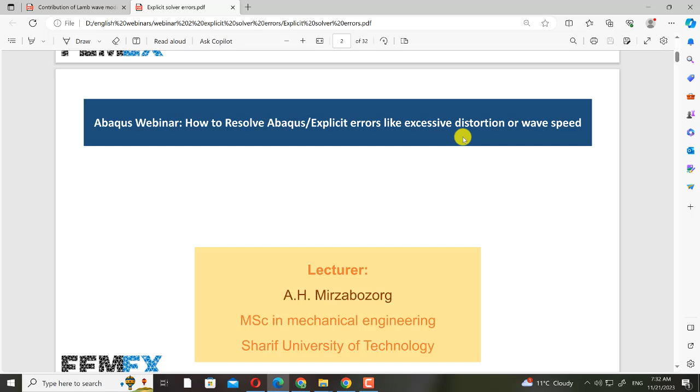Okay, I'm Amir Hossein Mirzabozorg, and in this webinar, I want to talk about how to resolve Abaqus explicit errors like excessive distortion or wave speed.

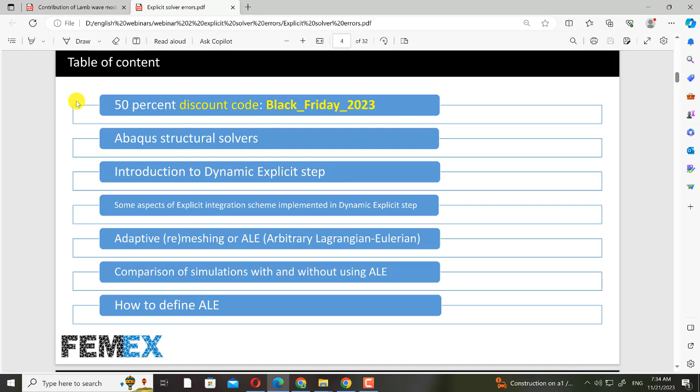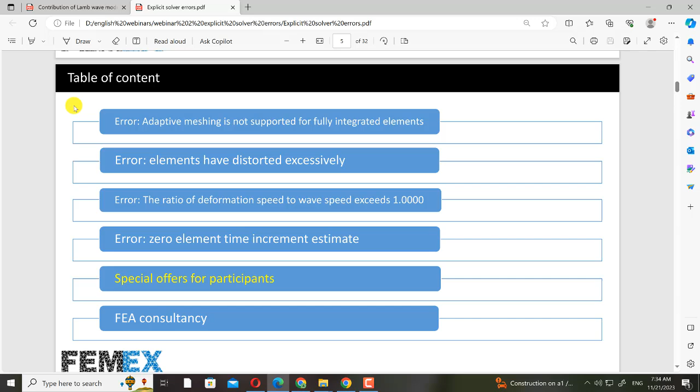And this is the table of contents of this webinar, and we will talk about a lot of useful things, and finally you will have a deep insight about the explicit solver.

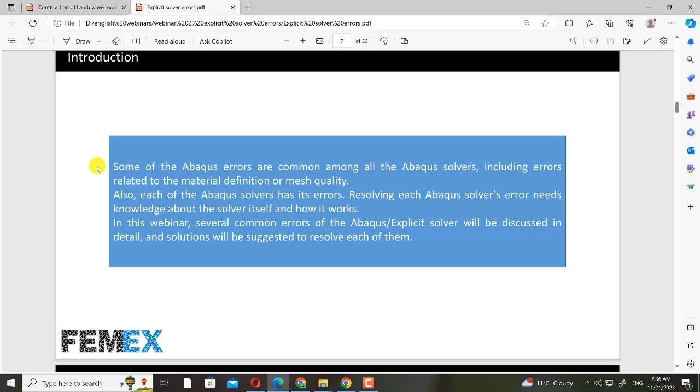Some of the Abaqus errors are common among all the Abaqus solvers, including errors related to the material definition or mesh quality. Also, each of the Abaqus solvers has its errors. Resolving each Abaqus solver's error needs knowledge about the solver itself and how it works. In this webinar, several common errors of the Abaqus explicit solver will be discussed in detail, and solutions will be suggested to resolve each of them.

As you know, Abaqus has two structural solvers for solving mechanical and structural problems. The first one is the Abaqus standard solver, and the second one is the Abaqus explicit solver. Abaqus standard solver uses implicit integration techniques for solving linear and nonlinear problems, and Abaqus explicit solver uses explicit integration techniques for...

Sorry, I forgot to share the screen with you. No, is it shared? Yes. I'm so sorry. Thank you so much for your message. Here is the, let me show you this again.

And in the step module, when you want to create a new step, if I open Abaqus here for your better understanding, I create an arbitrary part, okay, an arbitrary part, and I import it to the assembly module, and now we go to the step.

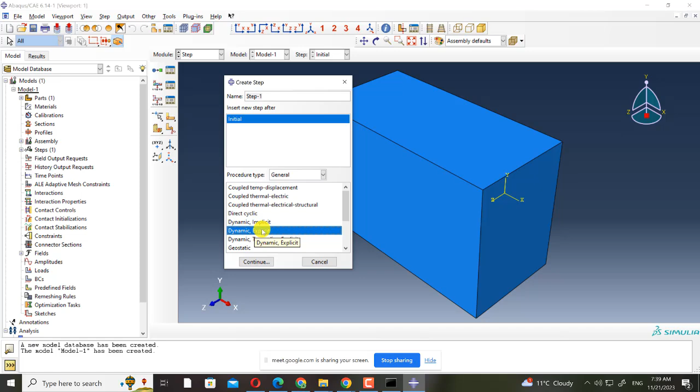Here I click on create step, and you must select between these steps if you want to do a nonlinear analysis, because the procedure type is general. And when you select the dynamic explicit step, it means that you want to solve your problem with Abaqus explicit solver. And I click on continue. And here I want to talk about some of these settings.

Dynamic explicit is one of the available steps of Abaqus explicit solver. Originally, it was developed for simulating linear and nonlinear dynamic problems. For example, it is suitable for analyzing low and high velocity impact, explosion, shock, wave propagation simulation, and other dynamic problems. By using some tools and physical concepts, you can use this step for simulation of static and quasi-static problems, such as some of the metal forming processes, quasi-static tests like 3 and 4 point bending tests, and tensile tests.

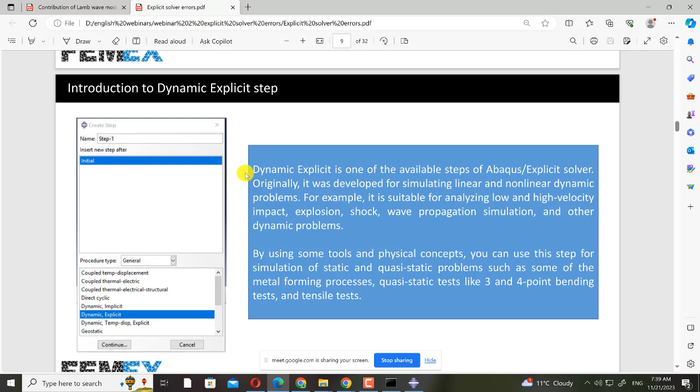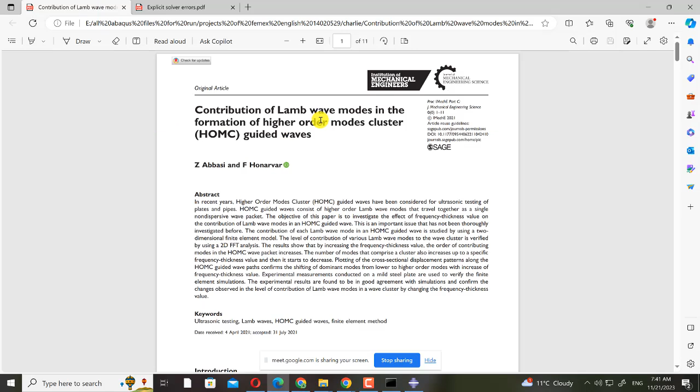We usually set it to automatic. Most of the time we set it to automatic, but in some special problems we set it to fixed. One of these cases is the wave propagation simulation. Here I have a paper for it. It is for the simulation of Lamb waves using the explicit solver.

Actually it is related to the NDT or NDI field, non-destructive testing or non-destructive inspection, where we put a defect in the structure and then generate pressure waves, and these waves go through the structure, impinge on the defect and go back.

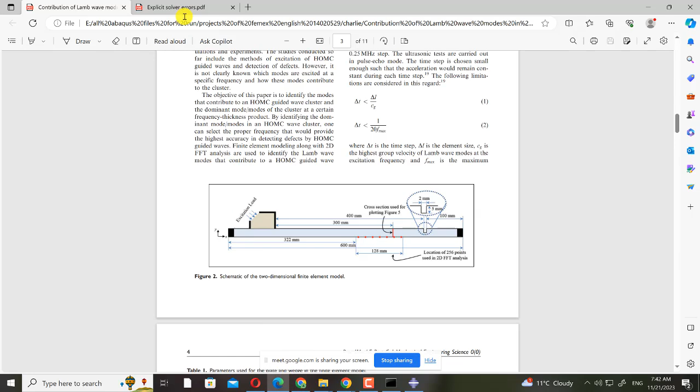They reflect, and then we can use sensors to capture this effect, and according to the reflected waves, we can understand the position of the defect and its size. This is NDI or NDT. From now on, I'm talking about the automatic method, because most of the time you must use the automatic method, and I will tell you why.

When you set it to automatic, the equation for determining the time increment size is this: the time increment size delta t must be smaller than or equal to the minimum of LE divided by CD for all elements in the model. It applies to all the deformable elements actually, because rigid elements don't deform.

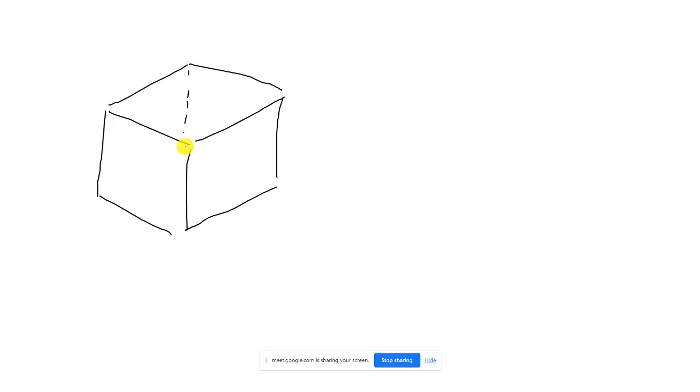LE is the characteristic length of the element, and it is a function of element dimensions. For example, let me create some slides. If your element is cubic, this is a cubic element. LC or LE, it has several names, is equal to this formula. This is A, this is B, and this is C.

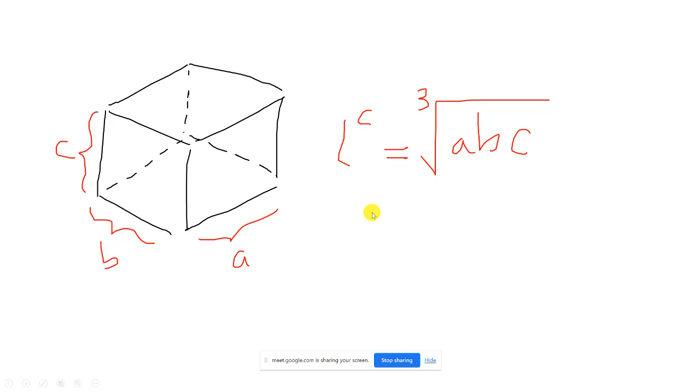For a cubic element, LC is calculated from this formula, and Abaqus calculates LC or LE for all the deformable elements in the model. Each element type has its own formula. Also, CD is the speed of sound, or the speed of the mechanical wave in the material, calculated from this formula, where E is the Young's modulus and rho is the density.

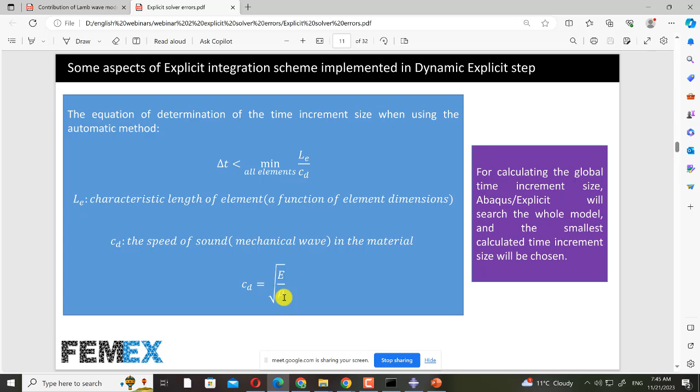For calculating the global time increment size, Abaqus Explicit searches the whole model, and the smallest calculated time increment size is chosen. The explicit integration scheme is conditionally stable, but the implicit scheme is unconditionally stable. The stability condition depends on the time increment size. With automatic incrementation, calculations are always stable because the algorithm always chooses a time increment size below the stability limit.

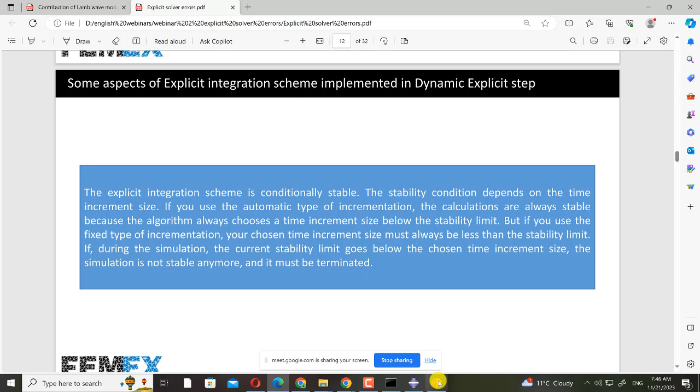But if you use the fixed type of incrementation, I mean this setting, your chosen time increment size must always be less than the stability limit. If during the simulation the current stability limit goes below the chosen time increment size, the simulation is not stable anymore and it must be terminated.

For example, we have delta t user, say 10 to the power of minus 7 seconds. During the simulation, delta tc goes, for example, to 8 multiplied by 10 to the power of minus 8. Here you can see that delta tc is less than delta t user.

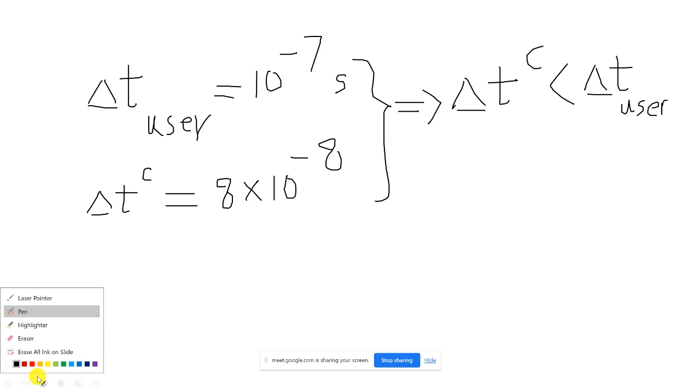This is wrong. After this point, the results are not correct anymore. It must be terminated, but Abaqus does not terminate it if you are using fixed time incrementation. So, for example, for wave propagation analysis, you must use a value that you are sure about.

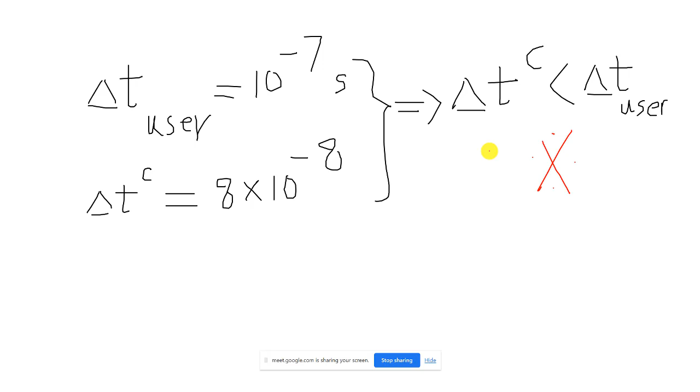Also, in some simulations, the stable or critical time increment size decreases during the simulation, and I will show you the slides related to it.

Here, you can see a job monitor dialog box related to the explicit simulation. In the increment column, the number of solved increments is written. In the total time column, the total solved time from simulation onset is written. And in the CPU time, the elapsed time or computational cost from the start of the simulation in seconds is

written. For example, it means that after 30 seconds, 0.07 seconds of the simulation time is calculated or simulated. It is the real simulation time; the CPU time. And in this column, the time increment size is written. Here, you can see that it is increasing. In some cases, it increases during the simulation, and in some cases, it decreases and increases.

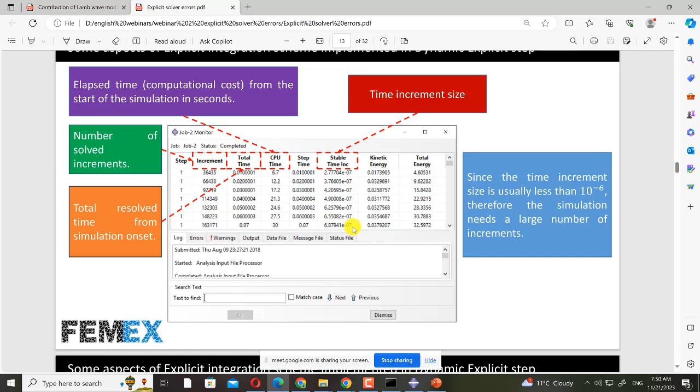Since the time increment size is usually less than 10 to the power of minus 6, the simulation needs a large number of increments. Here you can see that a large number of increments are solved. But when you are using the Abaqus standard solver, you have 1, 2, 3, 4, 5, or maximum 1000, 2000. But here, even for solving 0.07 seconds, 163,000 increments are solved. Why? Because the solver is using a small time increment size.

According to these two equations, we can obtain some understandings. First, the bigger the dimensions of elements, the greater the time increment size. The element with the minimum stable time increment size will restrict the global time increment size. Here, you can see that if I increase LE or LC, both of them are correct, then delta T increases.

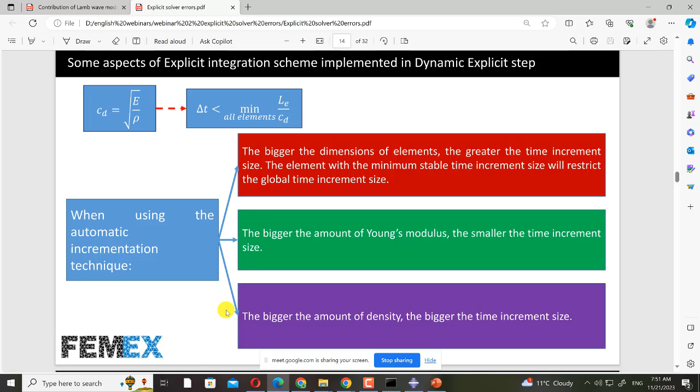And the bigger the Young's modulus, the smaller the time increment size. If we increase E, then CD increases, and if CD increases, delta T decreases. And the bigger the density, the bigger the time increment size. If I increase density, CD decreases, and when CD decreases, delta T increases. This is the idea for using mass scaling.

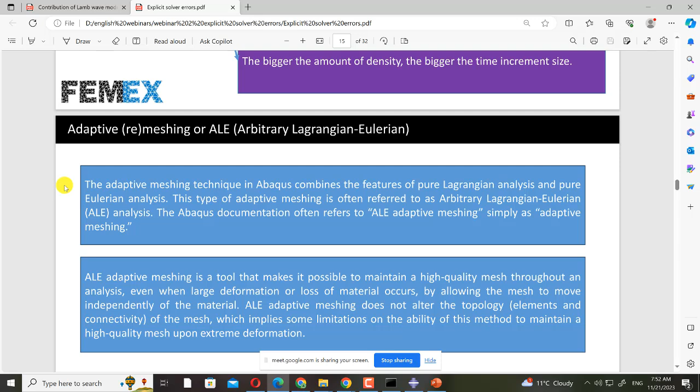Then I want to talk about ALE, or the arbitrary Lagrangian Eulerian technique. The adaptive meshing technique in Abaqus combines the features of pure Lagrangian analysis and pure Eulerian analysis. This type of adaptive meshing is often referred to as arbitrary Lagrangian Eulerian analysis. The Abaqus documentation often refers to ALE adaptive meshing simply as adaptive meshing.

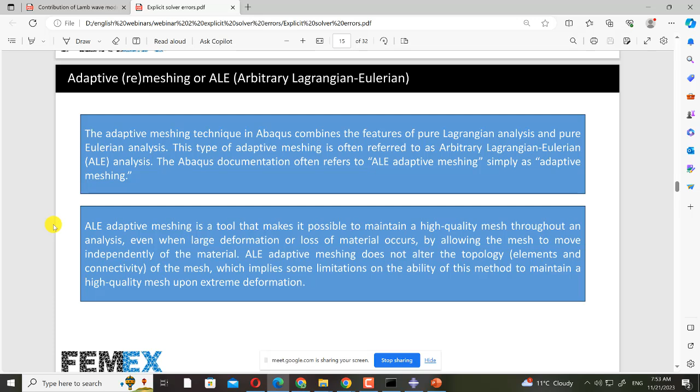ALE adaptive meshing is a tool that makes it possible to maintain a high quality mesh throughout an analysis, even when large deformation or loss of material occurs, by allowing the mesh to move independently of the material. ALE adaptive meshing does not alter the topology, meaning the elements and their connectivity, which implies some limitations on the ability of this method to maintain a high quality mesh upon extreme deformations.

Here I want to explain ALE with a simple example. We have a column and we apply a compressive load to it. If we only use the Lagrangian method, the conventional method you use most of the time, then we have severely distorted elements. But when we apply ALE to this model, because of the remeshing of the domain, we will not have any distorted elements, and the quality of the elements is maintained.

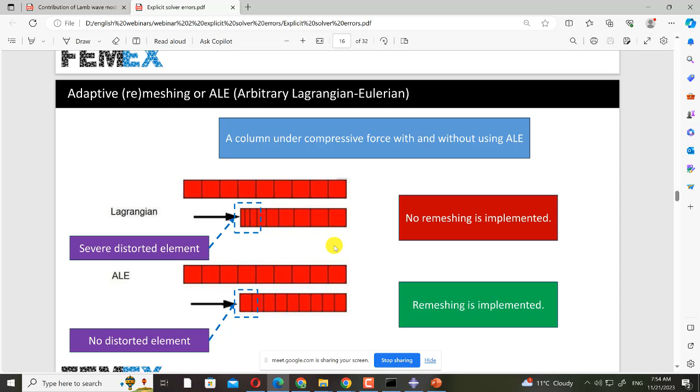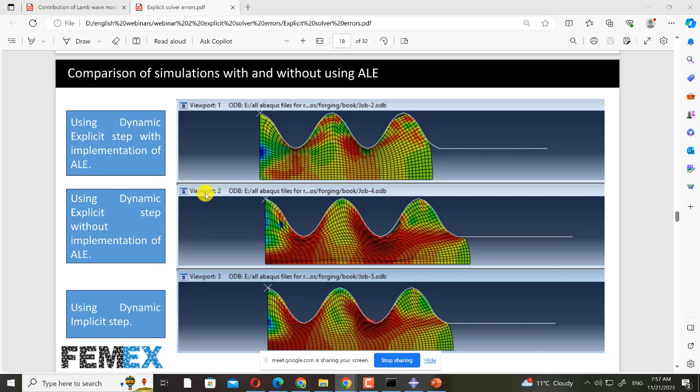And also in this case, I have used the dynamic implicit step, and also here we have severe distorted elements. Basically, in the metal forming processes that the workpiece undergoes large volumetric strains, we must use the ALE method. And if you want to define ALE, in the step module, you must go to Other, ALE adaptive mesh domain, edit, and you must select the step that you want to use ALE.

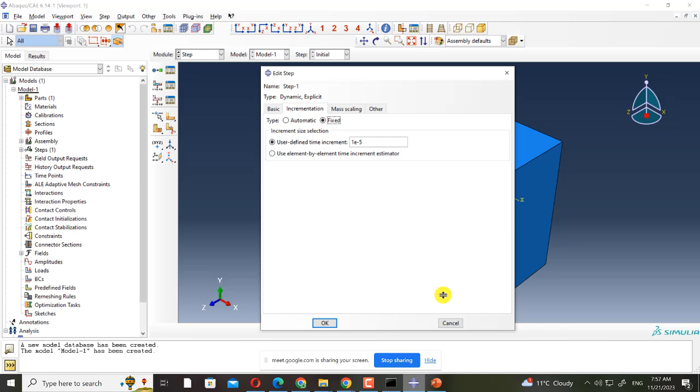Here, for example, I define this dynamic explicit step, okay? And I go to Other, ALE adaptive mesh domain, edit, step 1. And I set it to use the ALE adaptive mesh domain below, and I select the region, okay? There is no need to select the whole model.

For example, if you want to apply ALE to a part of it, you can make partitions and then apply ALE to that region only, okay? There is no need to select the whole geometry. And then you must set frequency and remeshing sweeps per increment.

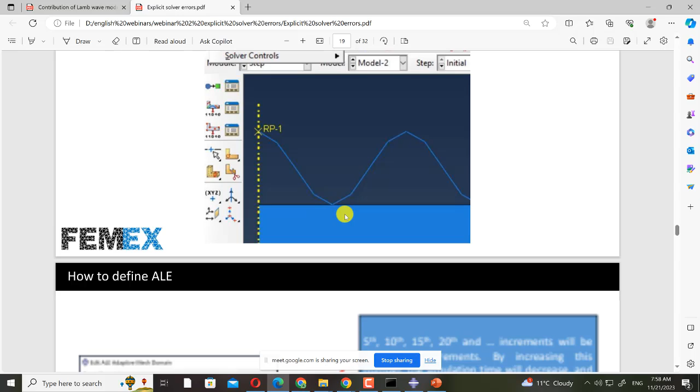Now I want to talk about these two parameters. First, frequency. In this case, I have set it to 5. It means that every 5 increments we have a remeshing increment, okay? It means that the 5th, 10th, 15th, and 20th, and some other increments will be remeshing increments. And by increasing this number, the simulation time will decrease, and maybe the excessive distortion error occurs.

And about remeshing sweeps per increment, here I have set it to 3. It means that in each remeshing increment, the selected region will be meshed 3 times, okay? And by increasing this value, the simulation time will increase and the quality of the distorted elements will be improved more.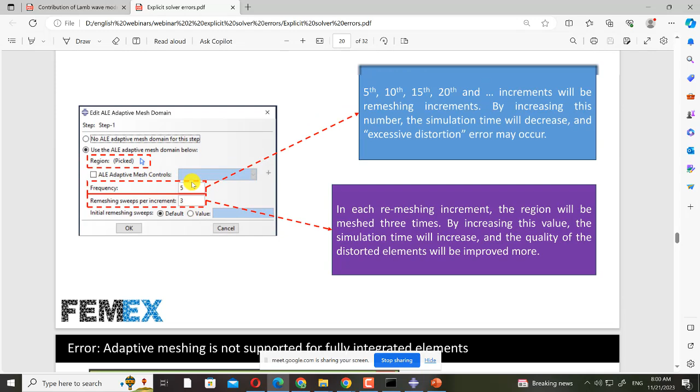Actually, there is no rule for determining the appropriate values for frequency and remeshing sweeps per increment for each simulation, okay? For example, for the extrusion simulation, for what I did here, 5 and 3 are good values. I have found them by trial and error. But, for example, let me show you another problem.

Here we have an axisymmetric simulation. This is the deformable target, and this is the rigid projectile, and it impacts the target with a high velocity. This is a high velocity impact, and I have defined ALE for this part of the target.

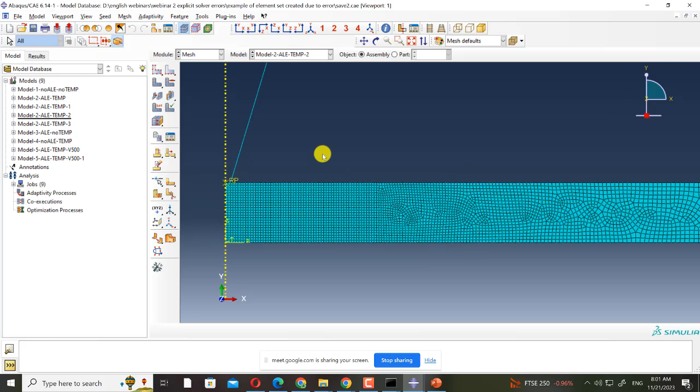And if you see here, here we have a uniform mesh, but here I have defined an unmapped mesh because this region is not important for us. Only this region is important. And also, in the step module, I have used these settings.

Here, the frequency is set to 1, and remeshing sweeps per increment is set to 60. Okay, 60. It means that in every increment, we must do remeshing 60 times. For every increment, 60 remeshing operations, okay?

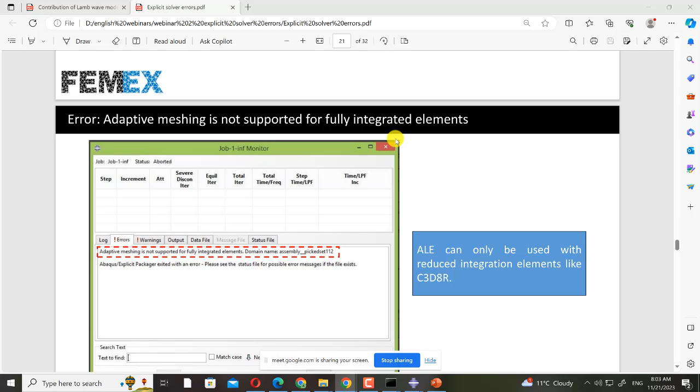Okay, so from now on, I want to talk about the errors. This webinar is related to Abaqus Explicit errors, and here I want to cover several important errors. The first one is this: adaptive meshing is not supported for fully integrated elements. It means that if you want to use ALE in your model, you must only use reduced integration elements. For example, in the 3D domain, if you want to use hexahedral elements, you must use C3D8R, okay?

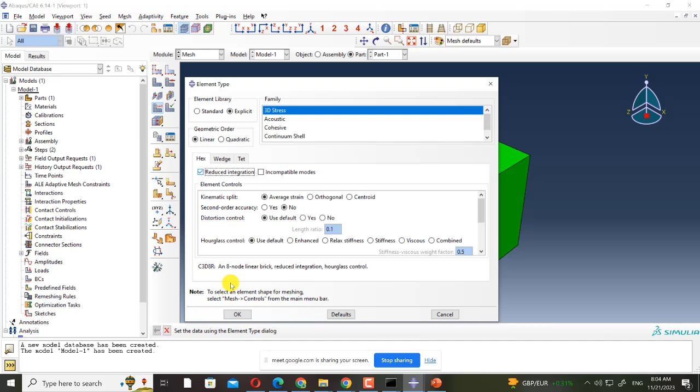For example, here I click on OK, and if I want to mesh this part, I can only use this type of element if I want to define ALE. If I use a full integration element or an incompatible mode element, I cannot use ALE. Only with this setting can I use ALE, C3D8R.

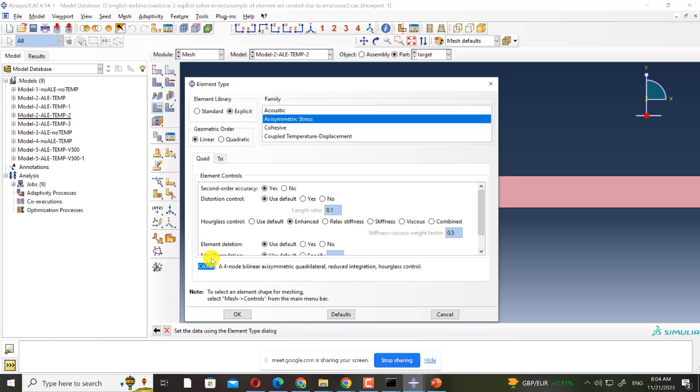Also, for example, in this model, if you see, also for this region, it is a reduced integration element. Also for the axisymmetric explicit analysis, we don't have any other choice. We don't have the option for full integration, we only have the option for reduced, and also you can apply ALE.

The next error, which is one of the most important errors of explicit solver, is: the element contained in this set has distorted excessively. This error happens when some of the elements undergo severe distortion.

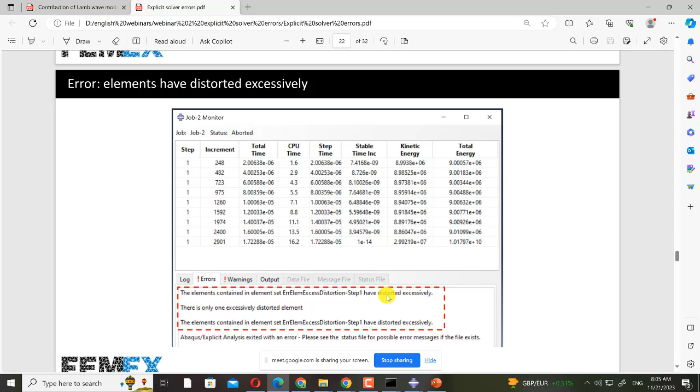For example, in this simulation, if I go to the job module, here you can see this error. And in this error, sorry, where is the... okay.

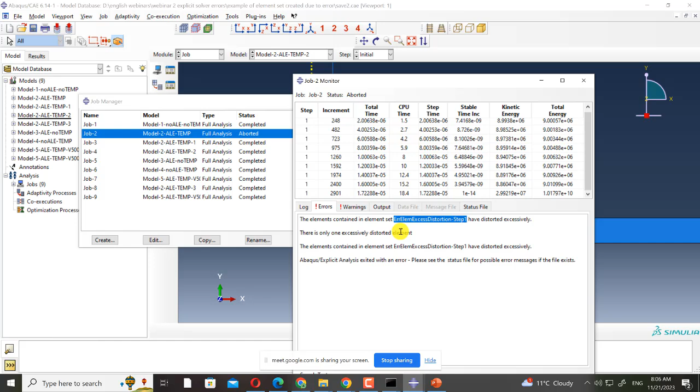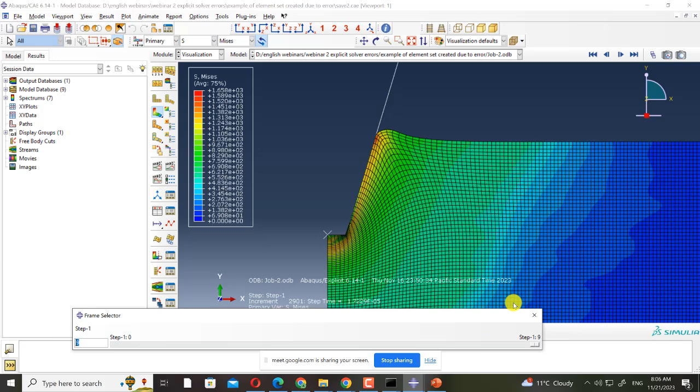For example, if you see, Abaqus talks about a set. And in this set, the severely distorted element is added. So I go to the results to check for this set. Here you can see that if I use more colors, we have this simulation.

The rigid projectile impacts the deformable target, and deformation happens. Also here you can see the damage contour, the damage parameter contour, and this is the JCCRT contour, which is the damage initiation parameter. And SDEG is the damage propagation parameter.

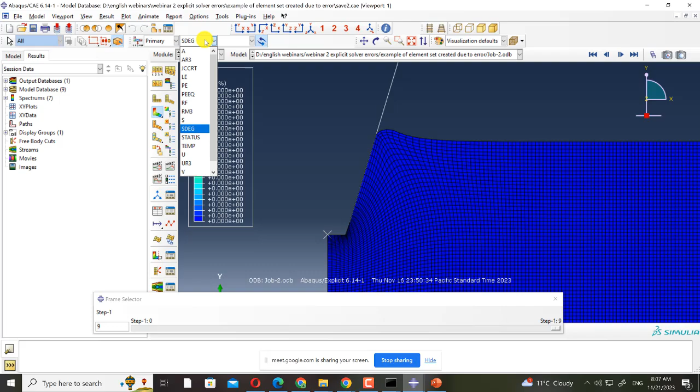Here you can see that we have a problem. And I want to show you the severely distorted element in the set. If you use the create display group option and set it to elements, you can see the mentioned set, and here we have that element.

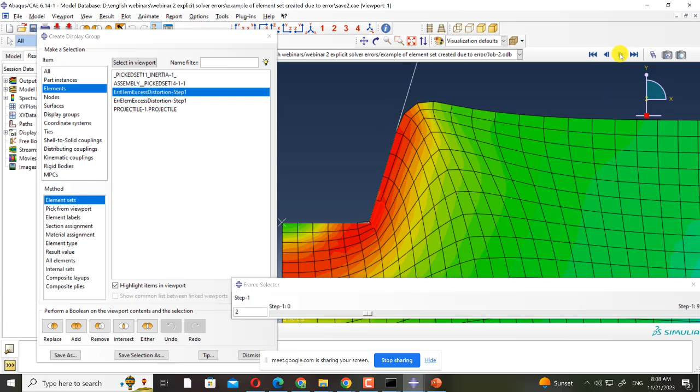If I go to the start of the simulation, we have this element, and then it deforms. Here you can see that ALE is applied and the topology of the elements is not changed. I am tracking the element, and what happens to it? Here you can see that element deletion happens.

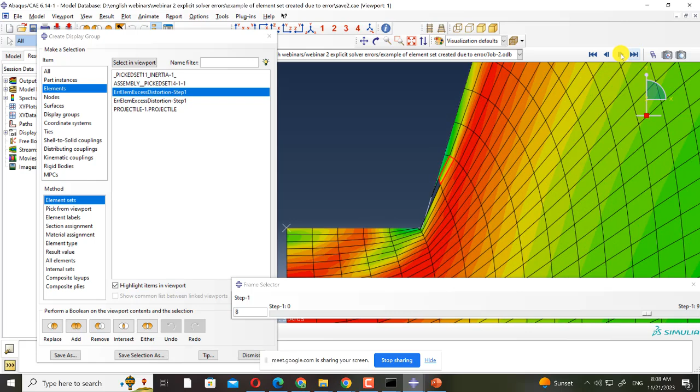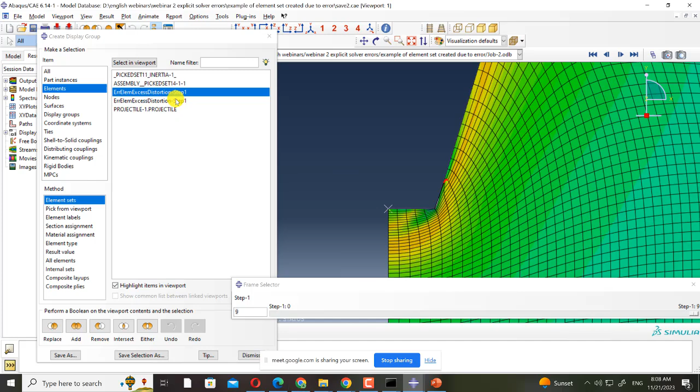And finally, it is highly distorted. I resolved it by changing the settings of the ALE, and in that video on my YouTube channel I have talked about it, and you can go and check it. So we can find the severely distorted element.

I want to talk about the solution for resolving this error. First, you can conduct mesh refinement or generate elements with higher quality in highly deformed or highly distorted regions. The second one is implementing ALE, for example in bulk forming analyses like extrusion, ECAP, and forging.

Also, you can define damage behavior to remove highly distorted elements. In such cases, the defined damage behavior must be able to remove damaged elements. Let me go to the property module, mechanical, for example damage for ductile metals.

Here I have worked with ductile damage, Johnson-Cook damage, and shear damage. Until now I have not worked with the other ones, but I have a lot of experience using these three important damage behaviors, and all of them have element deletion capability. But for example, if you use Hashin damage for composites with continuum shell elements for meshing your composite, then the Hashin damage model will not have element removal capability. But if you use Hashin damage model for conventional shell elements instead of continuum shell elements, then it has the element removal option.

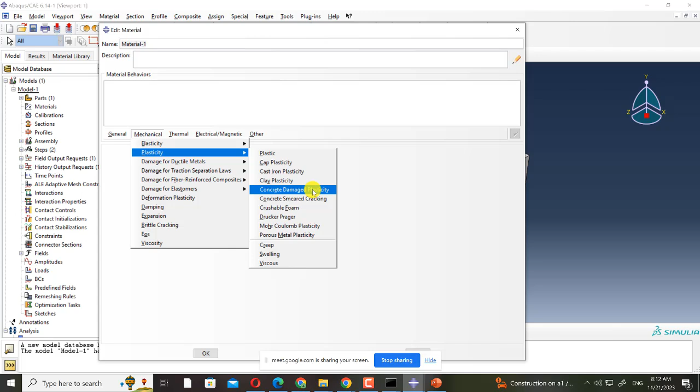You must define keywords from here, edit keywords. But it is not related exactly to this webinar.

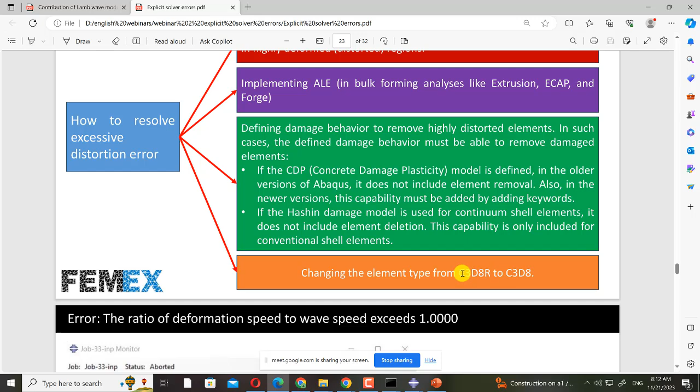And the last solution is changing the element type from C3D8R to C3D8. Because as you know, C3D8R element suffers from the hourglass problem, and if you change the element type to C3D8, which is the full integration element, then this issue is resolved, but you cannot use ALE anymore, because if you want to use ALE you must set the element type to C3D8R.

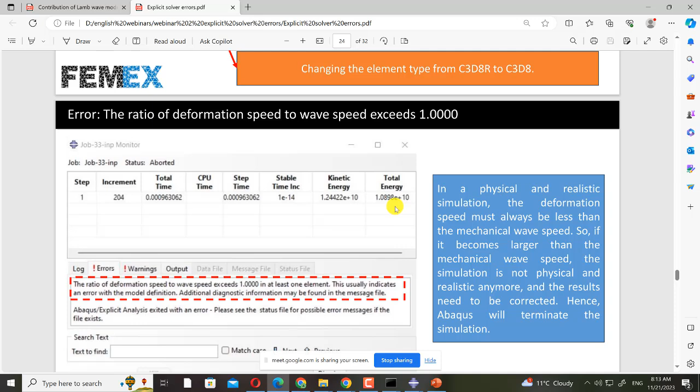The next error is the ratio of deformation speed to wave speed exceeds 1. In a physical and realistic simulation, the deformation speed must always be less than the mechanical wave speed, which I have talked about previously. For example,

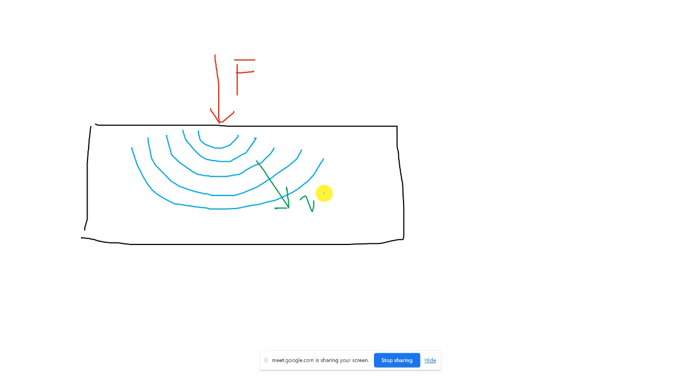in a solid part, when you apply a sudden, instantaneous force, mechanical waves propagate in a spherical form. The wave speed is approximately equal to the square root of E divided by rho, which I talked about in the previous slides, if you remember. This is the speed of sound, and if the deformation speed exceeds this value, you will face this error.

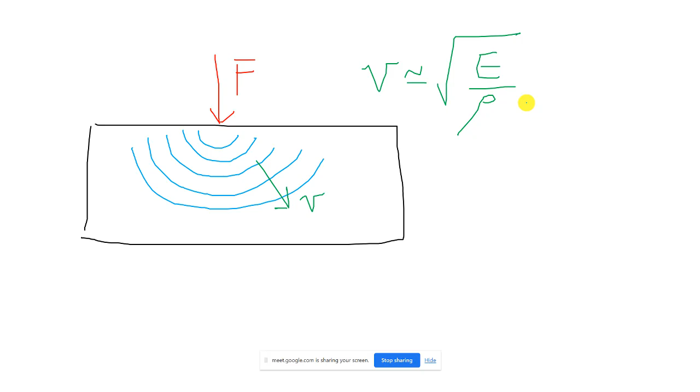In a realistic and physical simulation, this must not happen. The deformation speed must not exceed this speed. So if this happens, Abaqus will terminate the simulation because it is not physical anymore.

For resolving this error, you can use all the solutions suggested for the excessive distortion error. Also, you can use a mapped mesh in the stress concentration regions, including contacting regions and loading regions. For example,

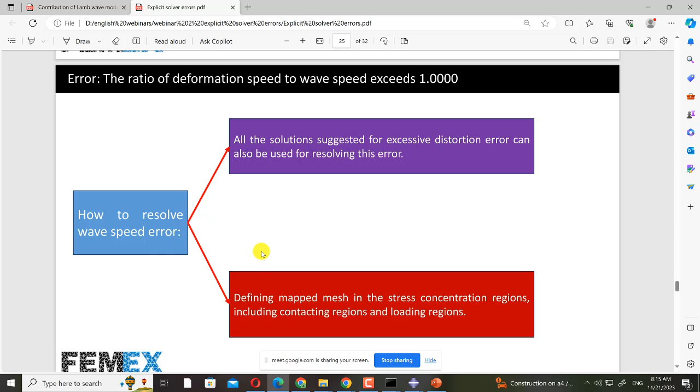in the simulation of high velocity impact, in the target, in the contacting region, you can see I have defined a mapped mesh. But in other regions, I have defined an unmapped mesh because they are not important for us. Only this central region is important.

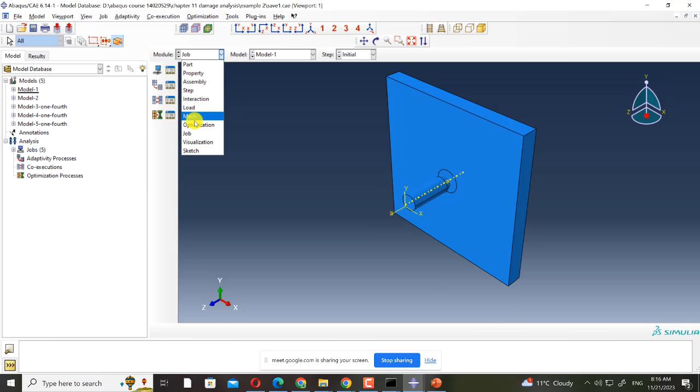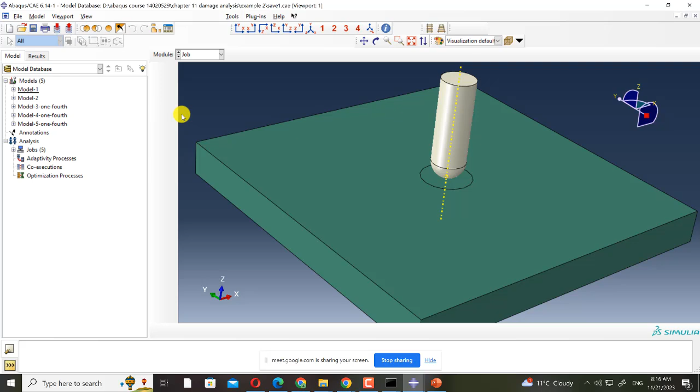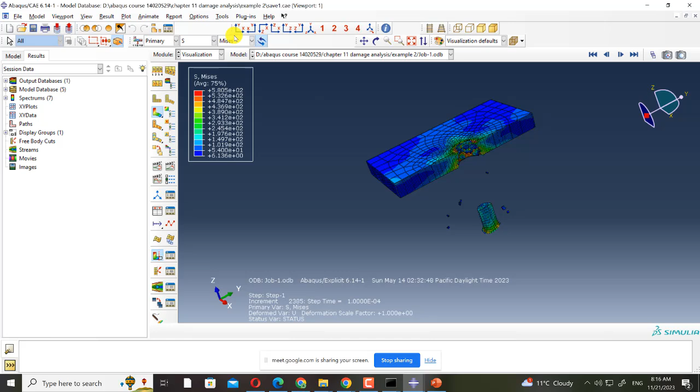This is the second example of chapter 11 of my comprehensive Abaqus package. Let me show you this example. Here you can see that I have used mapped mesh here. Now let's go to the job module, for the best view.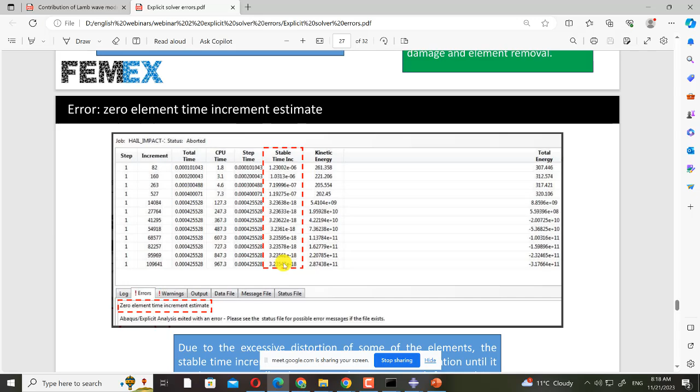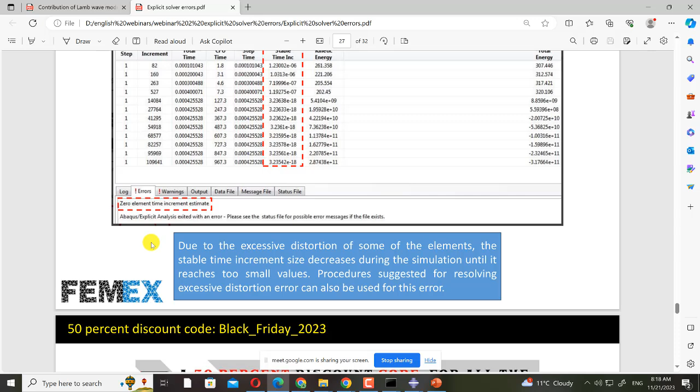The last error is the zero element time increment estimate. If you see in this simulation, the stable time increment size is decreasing during the simulation, and finally it reaches a very small value, and then we get this error. Due to the excessive distortion of some of the elements, the stable time increment size decreases during the simulation until it reaches small values. Procedures suggested for resolving the excessive distortion error can also be used for this error.

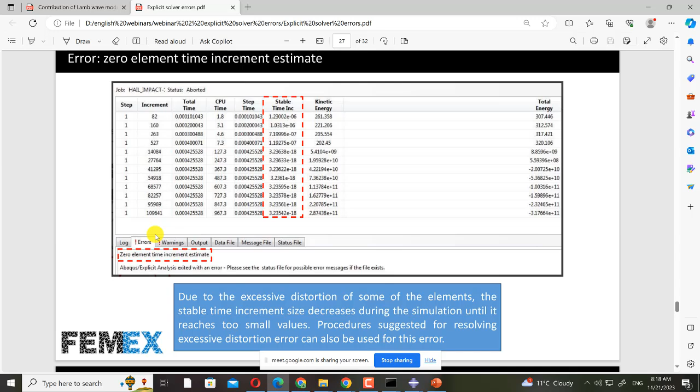So you can see that when element distortion happens, you can face several kinds of errors - for example, this error, or this error, or this error. All of them can happen due to excessive or severe distortion.

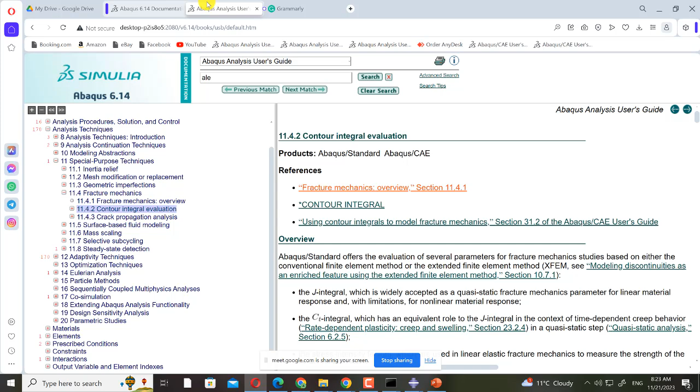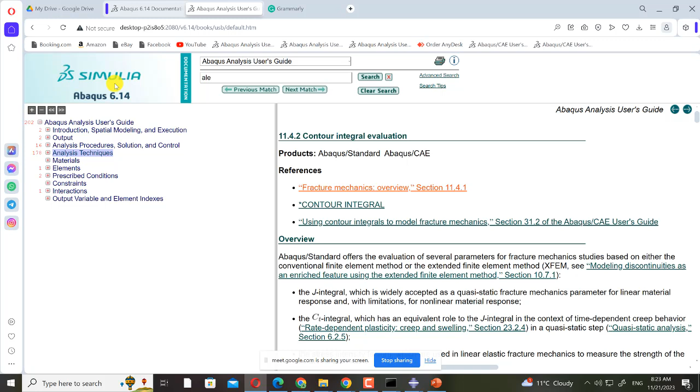Actually, we have three kinds of remeshing. ALE is one of those. Here, you can reach the documentation via Google. It is for version 6.14. It is in Google, in the Abaqus analysis user's guide. You can see there is a good explanation about all of it, if it is updated.

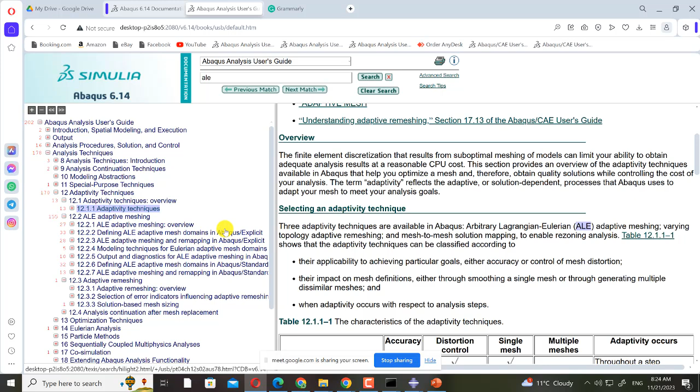I have read about it previously here. Mesh to mesh solution, sorry. Mesh to mesh solution mapping, adaptive remeshing, ALE adaptive meshing. We have three kinds of remeshings in Abaqus. For Abaqus standard, you can use this, and also I think this one, but this one doesn't work for severe distortion. For resolving severe distortion, this one is used, mesh to mesh solution. But I have not used it before.

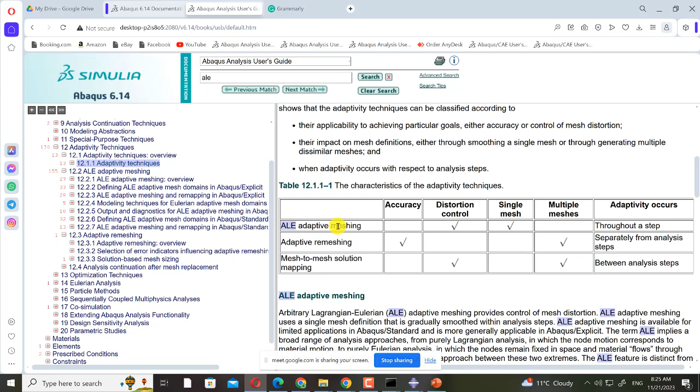For explicit analysis, you can use ALE adaptive meshing. And that's it. Is there any other question? Thank you, you are welcome.

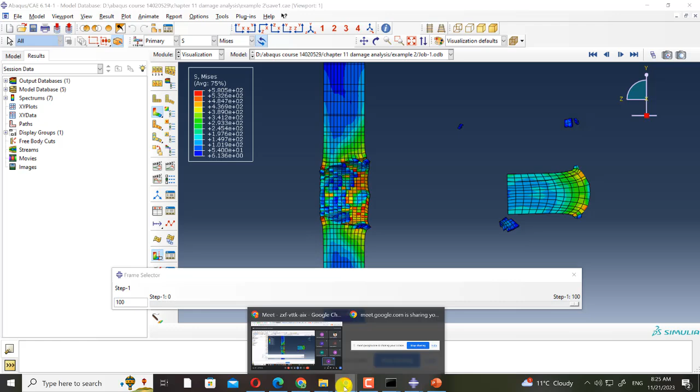Sina, don't you have any questions? No, everything was clear, thank you so much.

Basically, in simulations related to civil engineering, most of the time we don't face any errors if you use the explicit solver. But for mechanical engineers, this is not correct, and most of the time when they use the explicit solver, they encounter these errors. But if a civil engineer wants to model impact, for example impact of a bullet on concrete or reinforced concrete, you will face these errors.

Or if you want to model a complex structure which undergoes seismic loads or seismic deformations, then maybe you face this issue. Or when you define moving loads for complex structures, for example a train passes on a railway, and you have a structure and want to analyze the effect of the train crossing on the structure. In some cases, if your mesh is not appropriate, or if you have not defined damping correctly, you will face these issues.

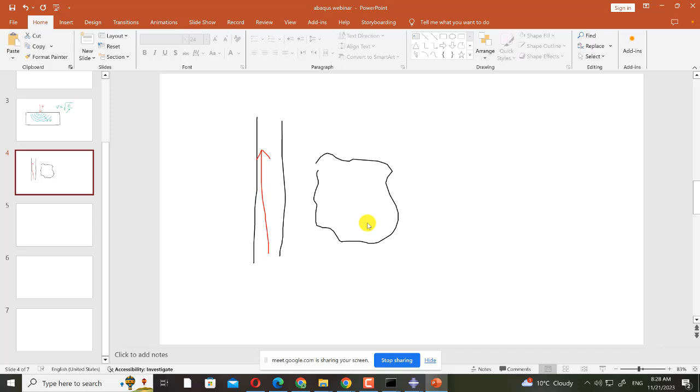But most of the time, mechanical engineers, aerospace engineers, and material engineers face these errors, not civil engineers, and this is good for civil engineers. Actually, civil engineers most of the time face too many attempts error or time increment error, and so on. I think we have only 2 minutes. Yes, please.

So could you please confirm, as I understood, in the same scenario, when we face problems with high nonlinearity or severe distortion, if we can do the simulation both in dynamic implicit and dynamic explicit, it's better to use dynamic explicit. Am I right? Not always.

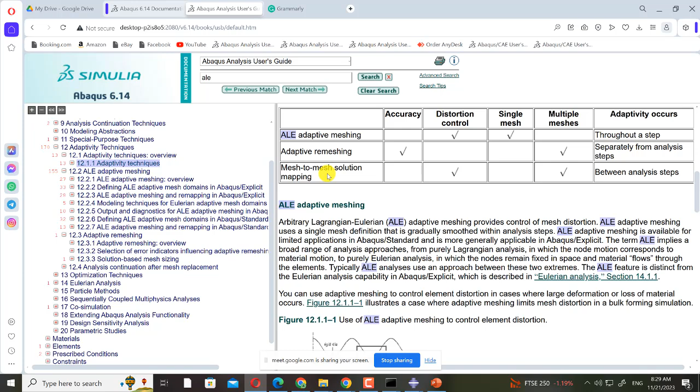The answer to this question is highly case dependent, okay? But yes, in some cases, for example for metal forming processes, yes, it's better to use the explicit solver because it has ALE. But for some other cases, for additive manufacturing, no. For additive manufacturing, maybe the mesh-to-mesh solution works, maybe, but unfortunately I have not used it. It's also for managing severe distortions.

Yes. And is there any other question? Thank you, you are welcome.